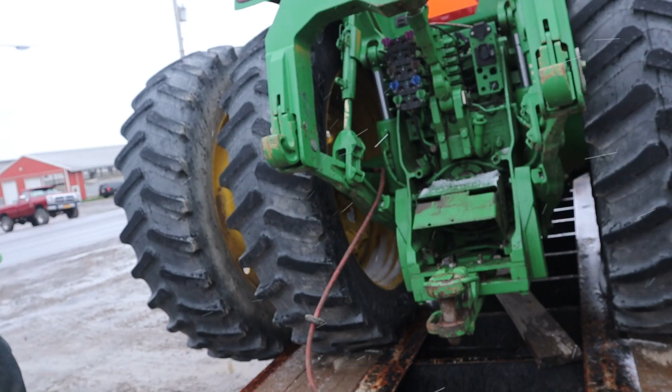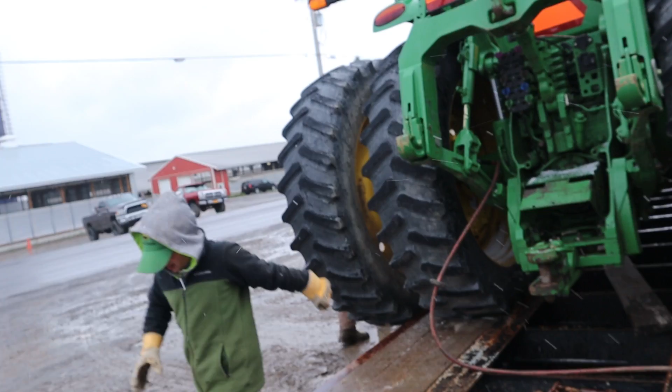Huh? You think you could back it off? You drove 7290, huh?

Alright, Jared's gonna back it off in there. He's gotta run it sideways just a little bit so he can run one of the tires over the front hooks on there, just so he doesn't cut the inside sidewall. The front tires are set out wide on this, so he won't really have to worry about them rubbing at all.

Hey, put that door up, Kerr.

We're gonna set the front wheels. We're gonna narrow them up for 30-inch cornrows. The rear wheels are set, and we're gonna leave them alone.

Alright, so we're gonna run in and get set up on this. Alright, we're finally inside here. We got the 8310 off the trailer. We're gonna change the front wheel width for 30-inch cornrows. We went and got silage trucks out here earlier this morning, and James and Joe are working on tires here now. They found out that that tool, this I don't know what the heck is it called.

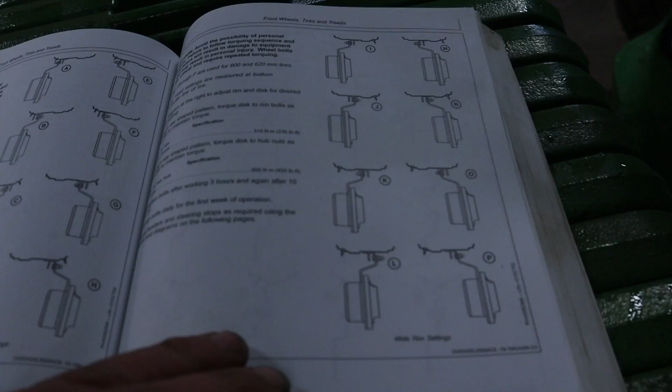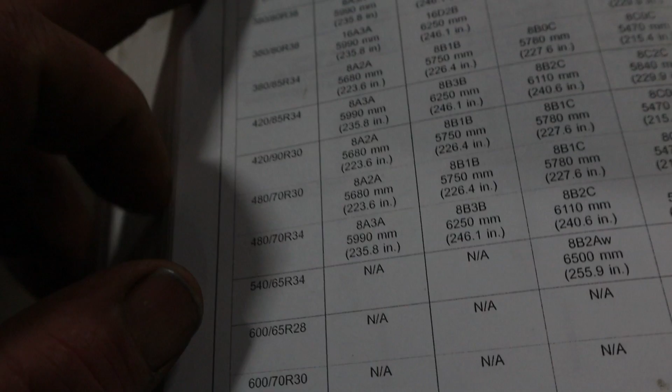All right, we're getting ready to set these wheels. Now in the book there's a fancy chart here, and on this next page here there's all the different tire sizes. Let's see if I can zoom in at all. Maybe can't quite zoom in. There's all the different tire sizes here right in the book.

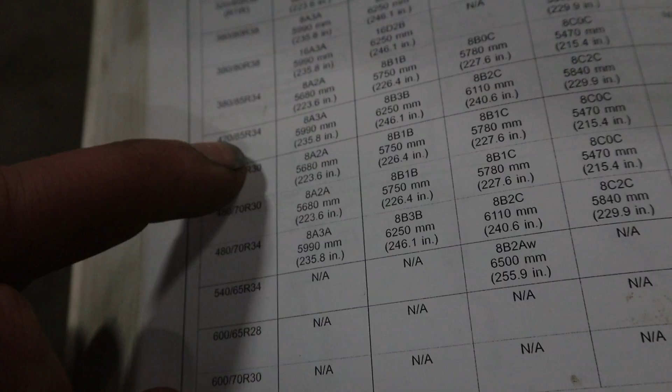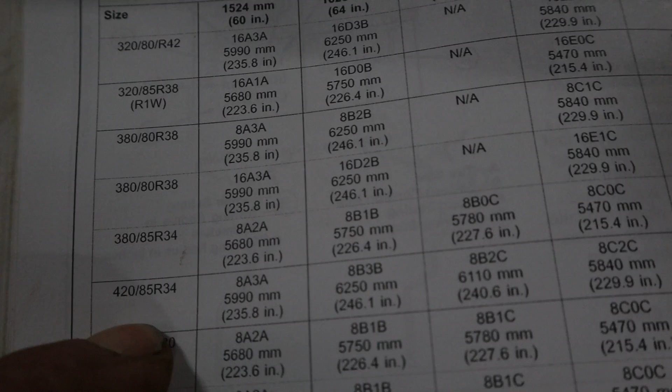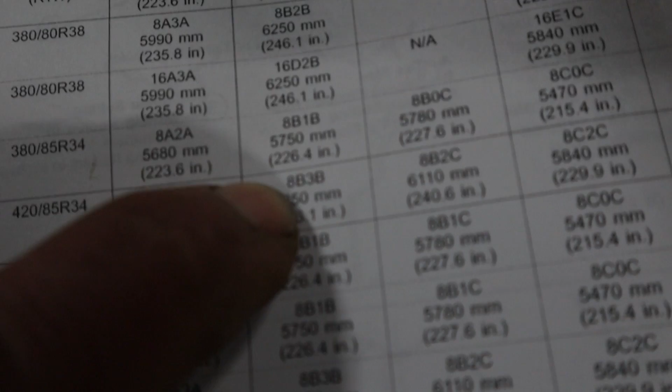So these are what's on this tractor: a 420 85 R34. So the first number in this chart, we're going to go with a 64-inch tread. That's what the back is roughly running. It's going to work with 30-inch rows because the tire's narrow enough anyway. So we're running a 420 85 R34.

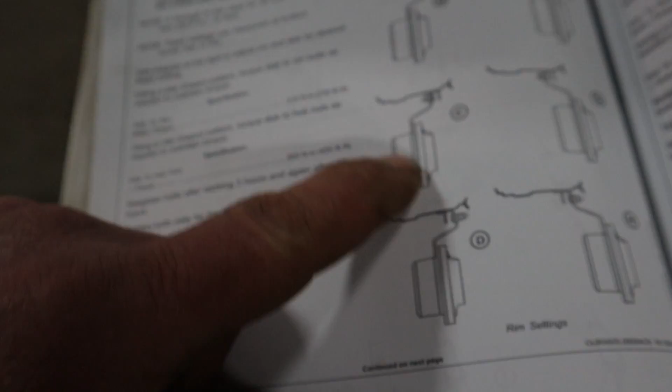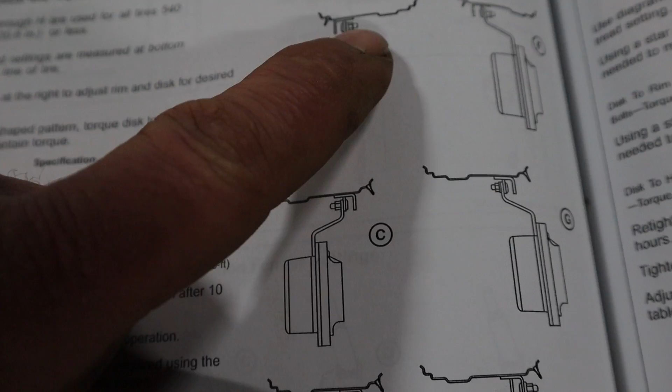First number is an 8-position rim, and then the second, which is a letter, is the position B, which is on this other page here. This is the 16 position rim here, and then we have an 8 position page here. So we want this setting here, which is dish in, rim in, and then we want to be on the mounting tab. There's 2 mounting tabs on these rims.

There's a step right there, which I gotta zoom in. Yeah. Alright, there's a step here, like that, and then a step there.

So what we have to do, we have to take the tire off, unbolt the dish, turn the dish around, or pop the dish out of the back side of the rim, and then actually we need to put this tire on that side over there. Yeah, we need to put this tire, it has to go on that other side. So we have to take the dish and switch it around. So we can't just take this tire and put it over there and bolt it on.

We have to take the dish apart as well. This actually, if we dismounted the tire, we would be turning this around and it would be bolting so that this divot here is on the inside. So we're gonna get these unbolted and get it set up so that we can get after it here. So, yeah, okay.

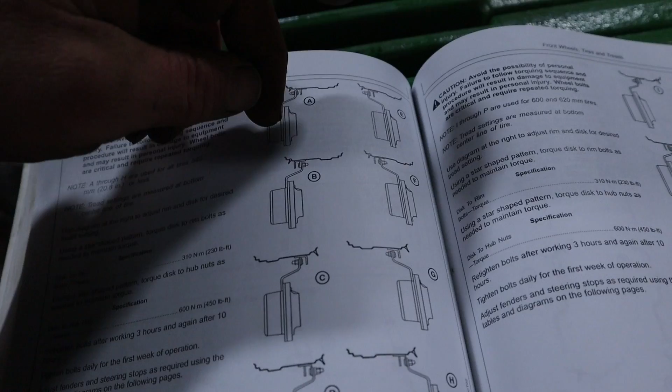Just put tires on the front of this. Alright, we're gonna unbolt the dishes. We've got to move the dish to the other side of the rim, so we're gonna do that now. Get the dishes moved around, and then we're gonna end up swapping tire for tire. This tire is gonna go on the other side because the wide part of the dish has to be in. You can see it right there. So that's got to be in. The bolt plate that's on the rim has to be to the outside.

This tire is going to be the outside on the other way, and this dish essentially has to be just flipped over. Alright, so we gotta flip this guy over. Let's gather all our bolts. You know what, why don't we just leave it like that? See if we can set that in the rim, be easier to put together, you know? Can we do it that way?

Got all the bolts loosened up on the wheel that came off the left side. It's going to go on the right side now. Now he's tightening the bolts up on the dish where the dish bolts to the rim. Because of the way that the tire is mounted on this rim, we have to switch sides.

Straight on, bud. I do. Hold it straight on. This 18-volt Milwaukee impact is a little too much power for him. Get right on there. Hold it, stay right straight with it.

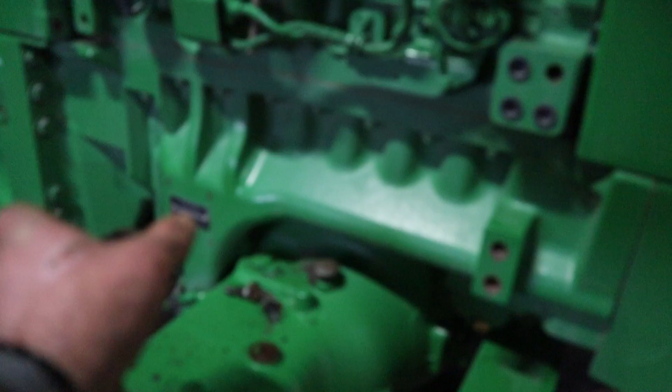Alright, we've taken our fender brackets off, and we have to flip them over, flip them around, and use a different position on the cast bracket pieces. Jared's retapping the holes, cleaning the threads out on his bracket, and Andrew is tightening up the one on his side. We're going to mount in these holes here now, and it was mounted in these ones.

We're in here on the left-hand side now, and Andrew's tightening up the bracket that's on this side. So this bracket would have been turned around the other way when this wheel was out, therefore allowing the fender to be out in the outer position.

So he's getting these tight here. I'll go in and retorque them a little bit. Then we can set the fender right on. I've got them tight enough. You got them tight enough? Yeah, you think so? He says he's got them tight enough. I'm just going to have to believe him.

Gotta go up a little bit with that one, buddy. Okay, grab them studs, will ya?

You got one of them punches, Andrew? Grab that punch off the floor there, will ya? There we go. The big one or the little one? I got it, it's all lined up. We've got a bend. She's in there.

All right, we're all set. We've got one thing left to do to this. What do we got to do to this yet? Andrew, what do we have left to do to this yet? Steering what? The steering stops. All right, so we got to adjust the steering stops on this, and then we'll be all set there, and then I'm going to mount my stuff up in the cab, and that's going to do it for this project.

The boys are getting tires on truck 8 here. Kerr's getting right after it here, and Joe and James. We got James hiding on the other side, he's been playing with a torque wrench here for a little while now. Well, he's getting right after it.

Okay, that's about as far as we want to turn it. Now I'm going to let him turn that wheel out and loosen up that bolt. This is a bolt that comes up against the casting. Actually, I'm going to loosen up this one on this side first. There it is, right there. I got to loosen up that jam nut, spin that bolt out, and then that stop comes against here.

All right, this thing is basically ready to go. Obviously we narrowed up the front end. We flopped the wheels around, repositioned the dishes on the rims so that we get the wheels narrowed up. We're running at 62 inches, 62 or 64 - should have been at 60. But the rear is at 62 or 64, so we're matching the rear because we figured as long as the rear was as close as it was, it didn't need to be monkeyed with. So the front end's been repositioned.

We've got the steering stops where we want them, where they need to be, and we've got the fenders mounted correctly. Now, I've got everything up in this tractor except for the 2630 display. I ended up taking this crossbar that runs between the front and the rear corner post - I took that out of the 7290 because I didn't know if this tractor was going to have it, and luckily enough it's the same cab, and that bar went in there. So I'm going to mount my display right there.

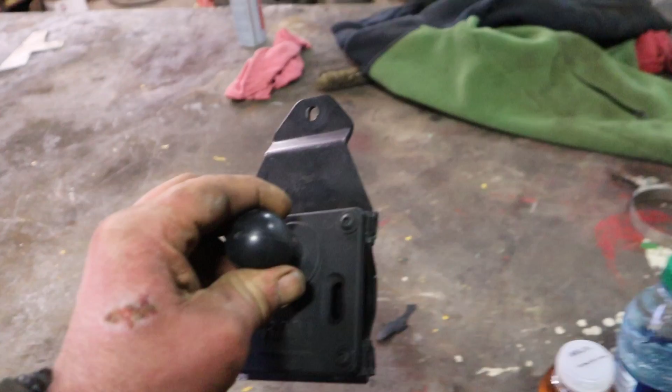The only thing I don't have in here that I had on the 7290 is the CB radio, and I had that mounted right there. So I ended up having to send out the 2630 display for repairs, and I just got that back the other day. So I'm gonna mount my RAM mount to the back of the display. I'll show you how - I'm gonna pull this out of the box, and then I'll show you after I get this all mounted how I have that on there.

Here's the box that it came in. Ag Express did the work on the display, so we're gonna have to mount that face down on the bench here. But it's got a whole new screen in it. Something happened to the actual display itself - the touch screen - so they had to put a new one in it, and it has been serviced, and of course it's got a tag on here, that sticker.

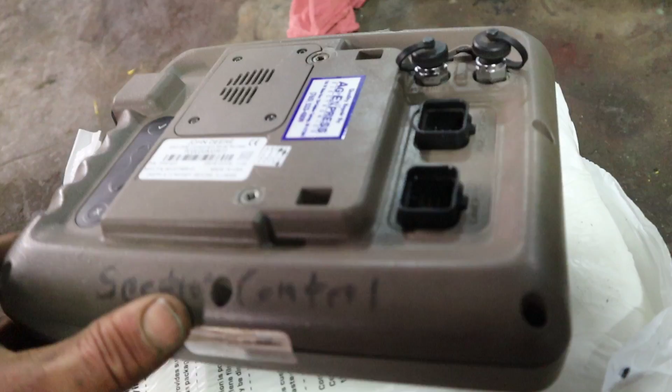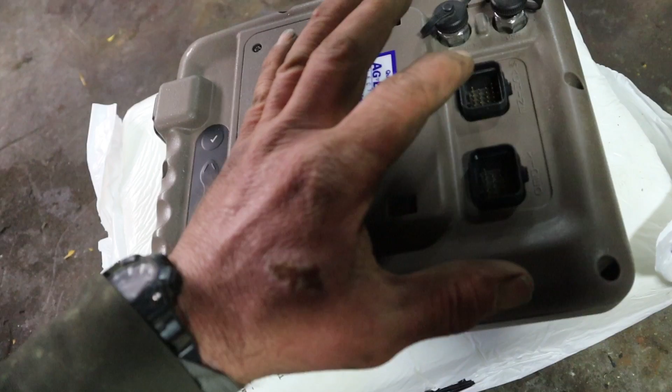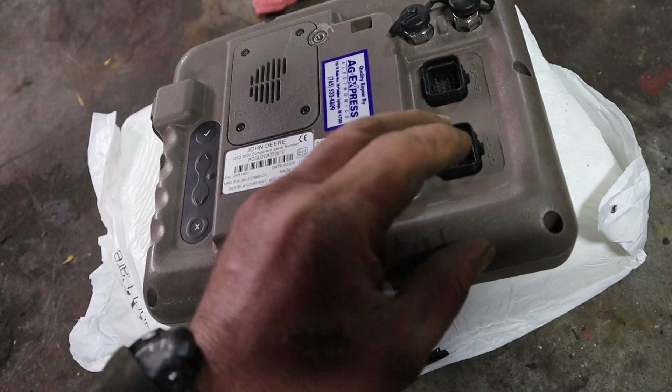If you remove that sticker, it voids the warranty, because they do not want you to get into these displays at all. Now the other problem that we had with this display, when we put it in the chopper last year, there's a machine plug receptacle and a receptacle here for video. The chopper has cameras on it that plug into the display, and the plugs that were in this display were actually 2 machine plugs, so we could not plug the video port plug into the back of this display. So they had this changed.

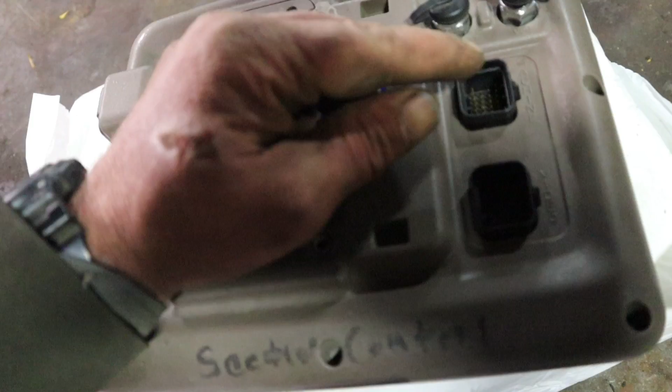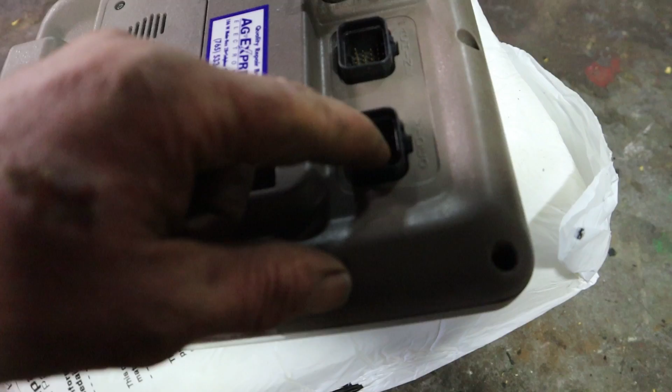It had about the same, well, the exact same amount of pins, just the slides were different. The slides on the machine port have 3 grooves - you can barely see them in there. And the camera or video groove has only got 2. So I'm going to mount this RAM mount to the back of the display like that.

Once I get that on there, I'll show you what it looks like up in the cab, because I have an extended wire plug that goes from the corner post to plug into the display. I end up running my display up into the ceiling, and I can actually run that display closer to me, and I'm not always leaning over.

So let's get this mounting bracket on there. This mounting bracket is the same one I use when I take this display out and use it in the chopper. It's got a RAM mount assembly with a different style rail than what's in this tractor, running between the front and rear post. It's on a slide, using this RAM mount assembly as well. So rather than changing brackets on the back of the display all the time, I built a bracket up in the tractor cab to accept this display just like this, and it's a lot easier moving it back and forth. You just loosen up this clamp here, and you could take the whole display right out, leave the ball mount right in the tractor, and you're good to go.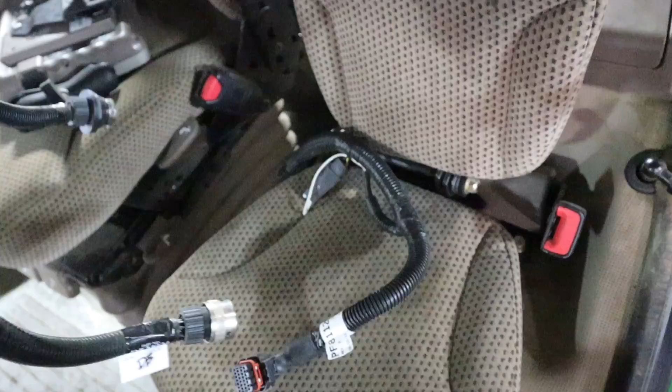Now here is the extended harness that I bought. This harness hooks to the corner post, and it actually goes between the corner post and the harness that plugs into the back of the 2630 display.

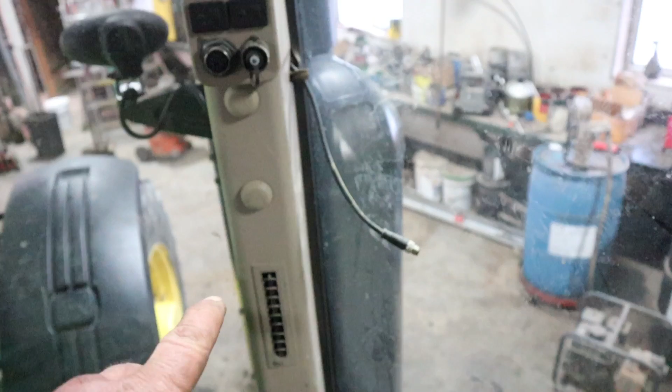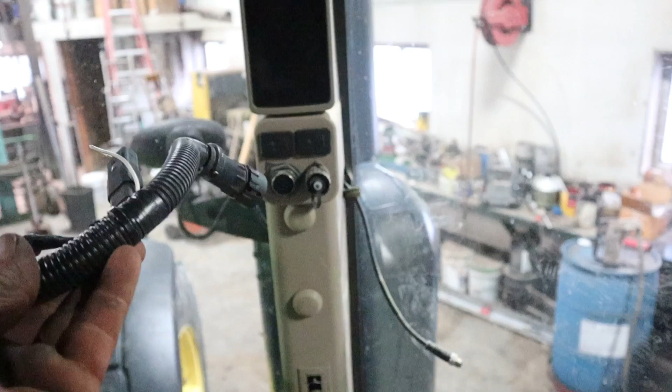On most of the John Deere tractors, everybody's mounting their display from a bracket that is on the front right corner post. You plug the harness, which is this harness here, into the display, into the corner post, and then this is the plug that plugs into the back of the display there. Now I need about five hands here, and if you have this plugged into the corner post, which we can do, I guess.

Get this camera lined up so that it's visible here. So if you had the cable into the corner post like that, and you had this plugged into the back of the display here like this...

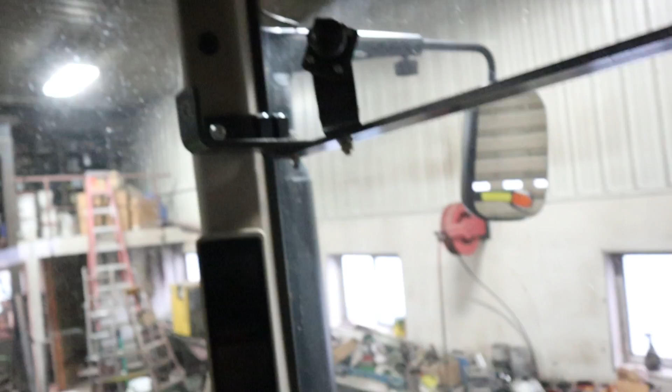You're kind of limited to where you can put that display. You can't mount it any higher than that. I don't know if you guys can see that. Can we see that? Yeah. So that's got the standard length harness, and you can't mount that display any higher than that. It doesn't allow you to see your gauges at all. So it doesn't matter where you have this display, here, here, or over here, you're reaching for it. So with that extended harness, it allows you to have the display up higher.

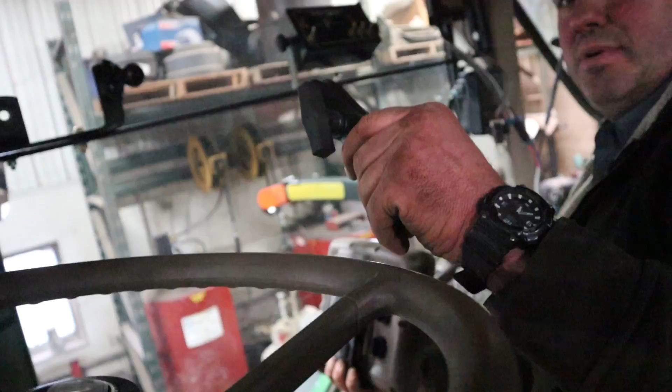Now, you want to run this camera? Alright, step back a little bit, okay? You got it right in? Yeah. Okay, so we're going to unplug this. Junior's running the camera. We're going to unplug this harness. I'm going to mount the clamp right here.

Keep the camera straight now, bud. Going to mount the clamp on the... There's a mount that I have here on the bar. This bar has got a slot in it, so anything you mount to it, you can adjust and slide back and forth. So I'm just going to get that mounted on the display, the clamp, get that held in place.

Now these are the 1.5 inch size RAM mount balls. So there's that. I've got this harness. I'm going to plug this in the back of the display.

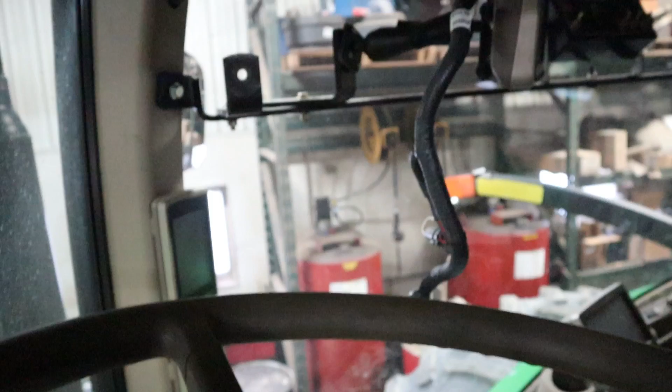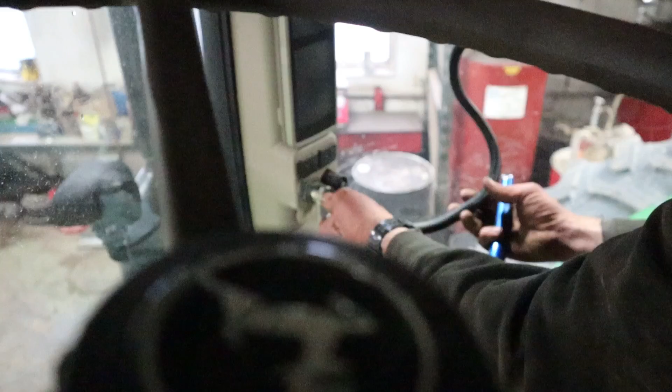I've got to make sure I get the machine plug, which is the top one. Plug that in like that. And now here is the extended harness. You got that in view, bud? Here is the extended harness here. I just mount that on one end of the machine, or the display plug. Mount that like that. Then I plug this into the corner post, and now we are good to go.

I've got to get a zip tie. I can put this up there like that, put this back around there or something, and get this zip tied out of the way.

I've got the wire, the extended harness, plugged in there. It's running up through, and the machine plug is coming into the back of the display. That display is right there, but I can run it closer to me if I wanted to. I could slide this bracket back on this rail—I'm going to show you the bottom side. On the bottom side of this rail, you can slide your mounts and then just re-tighten them down.

So we'll just fire up this display and turn the key. Just turn the key on now. Now the 2630 display is coming online here.

I've got to put all of our data into this display—in other words, our fields and any prescriptions that I end up putting in for planting corn. This display here has section control on it, and it has auto steer on it. We're running auto steer from the 2630 display, not the armrest display. So once this display fires up, I'll come back to you here.

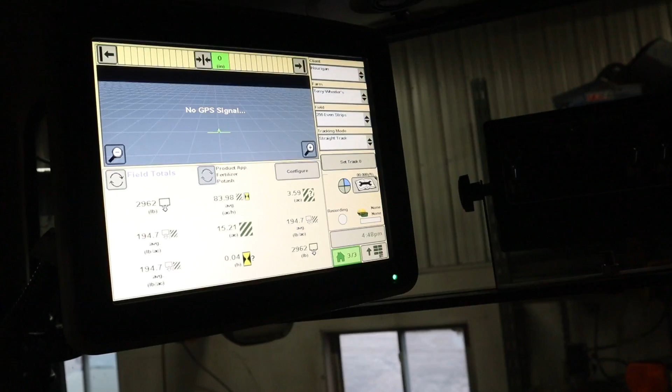Alright, the display is fired up and it's online now. So with the display mounted where it is here now, it makes things a lot easier as far as accessibility. Accessibility is like right here—bang, you can get right to the display very easily.

It's too far away if you're reaching for it down here. And the highest that you're going to be able to get this display is right here, and that's about the closest you're going to get the display too, right like that. You'd always find yourself leaning forward to get to the display. It's just so much better right up here, and you can keep one eye on that very easily. Your line of sight is right at that height anyway.

So anybody that's looking for this extended cable, I bought it—I actually bought it on eBay.

So with that being said, folks, that's going to do it for this video of screwing around with this tractor today. Again, I don't know how long the 7290 is going to be tied up for, but we're going to be ready to plant here next week with this tractor anyway.

So, next week? Yeah, next week. So we had some snow here today, spitting snow and whatever.

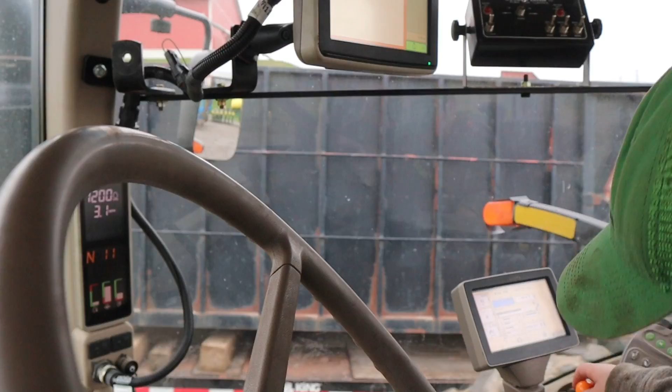Overnight, so that's gonna do it for us. So there you go, bub. That's good. There, we're good to go, huh?